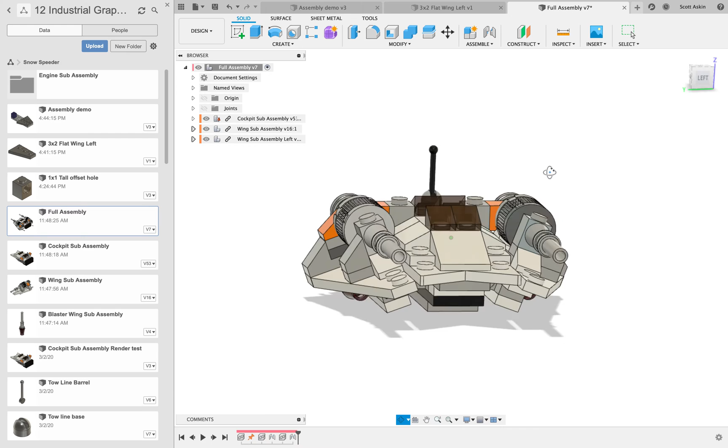The goal of this tutorial is to consider how you can mirror not just a single part but a whole sub-assembly. To explain that, I want you to just have a look at my snow speeder here, and you can see that the engine assembly on the right is identical to the engine assembly on the left.

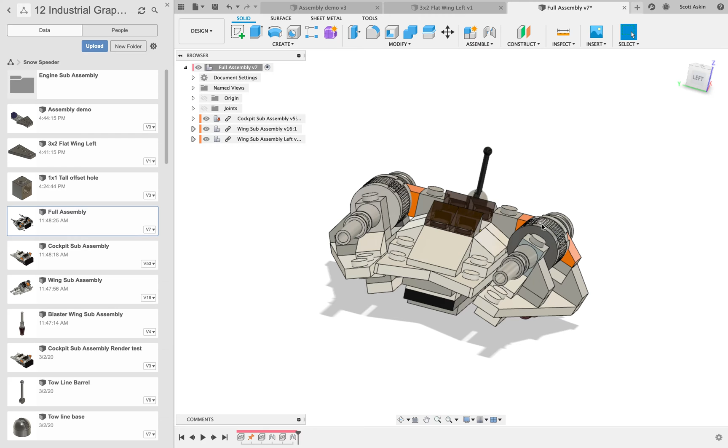So when I was building this, I made the decision that I would build the cockpit as one assembly, and then I'd make this whole engine and wing sub-assembly as another piece. Now, to save me countless hours of having to assemble this left engine and all the wing, I can actually grab the right engine and wing assembly and mirror it over to the left. I can create a left hand wing if you like.

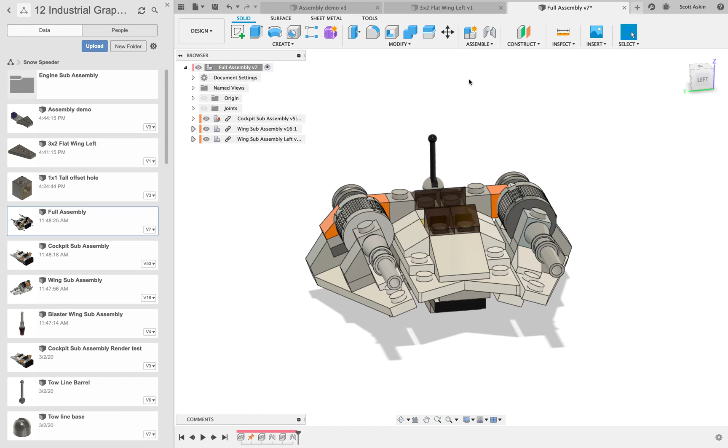So I'm not going to do it with this actual design because it takes too long to do, but what I want you to do is to go back and open up your assembly demonstration that you've been working on. So go back and open up this one here, which we did last lesson actually. We're going to do something similar where we're going to grab this entire assembly and show you how to mirror it to create a left hand side.

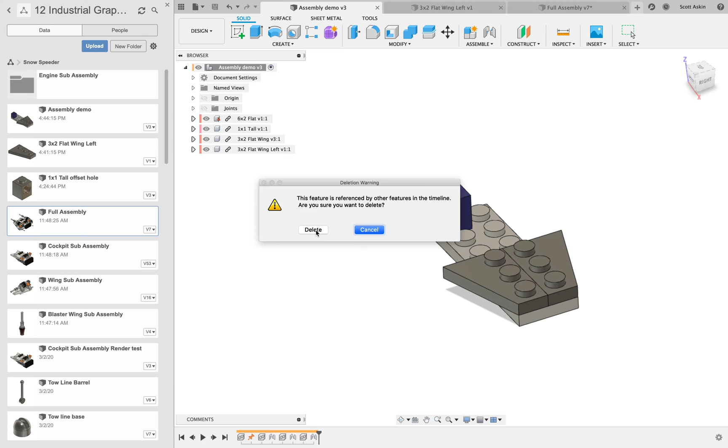So the first thing we'll do is we'll just remove the last wing that I put in there. So select it, right click and delete. That's okay, we can hit delete and then hit save. And then we'll select all these components, mirror them about a plane out here somewhere in space, and then create a left hand side of this.

So if I was going to name this as something now, I'd probably name this as assembly demo right. So this is the right hand side, and then I'll have assembly demo left over here for when I actually mirror to the left. So it's a little bit different from a straight body or single component mirror. There's a few more steps you've got to do.

Alright, so whenever you've put something into an assembly, you'll see the parts here then appear as what we call components. They're no longer bodies. If I expand that there, all these bodies are sitting inside of this component.

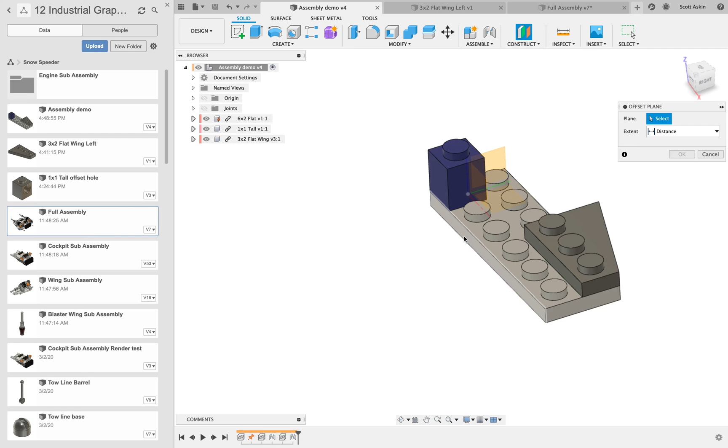So what we're going to do is still use the mirror command, but before I go there, I'm going to set myself a work plane out here somewhere in space that's going to be my mirror. So go to construct, offset plane, select a face here, and then just drag a plane out there in space somewhere. I really don't care how far away, let's just make it 20 millimeters for argument's sake. That's going to be the plane that I use to mirror all this about.

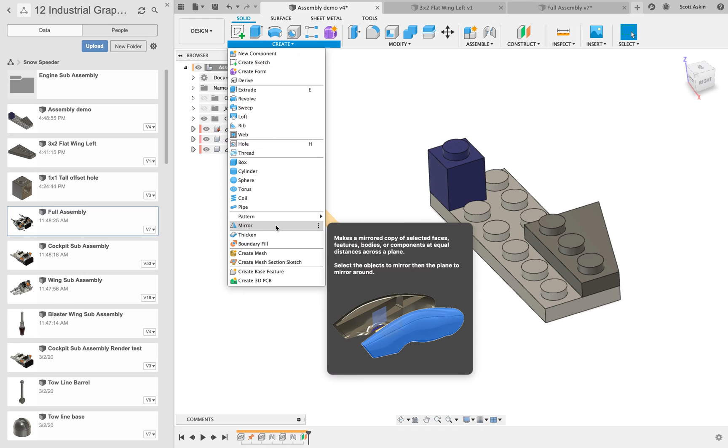Once you've done that, step 2, go to create, come down to the mirror icon, and at the moment it's looking for a bunch of bodies. Let's change that to components, and then we can put a box around all those components, and it stores those components. So you can see it's selected 3. I could have also selected them there as well.

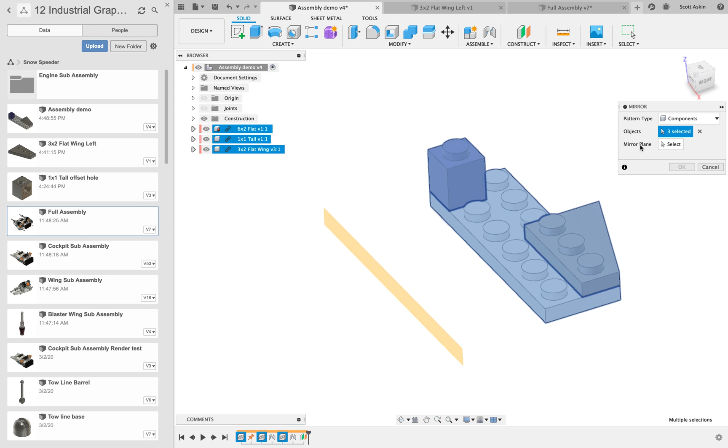Now it's asking for the mirror plane. It's pretty simple. You click on the box, click on this plane here that we just put in, and you can now see it's created a perfect mirror. We've got a right hand assembly and a left hand assembly. Click OK.

But now we've got to get rid of this original right hand because I want to use this left hand assembly by itself. So you'll notice that there's these little chain links on the first 3 components of the original assembly. If we want to remove these parts, first of all we've got to break the chain between this mirror and the original parts here.

So you select the parts that were there originally, just hold down shift and you can select more than one at a time, and then right click, and one of these icons here is called break link. So click on break link, and the computer then goes through a little series of breaking those links, which I think it's done. Yes, the links have disappeared.

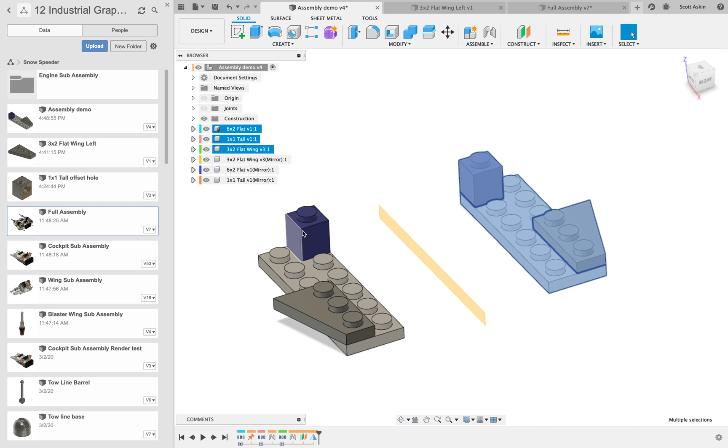And then we get rid of these 3 pieces by clicking the top one again, hold down shift, make sure you get the right ones, don't get the left ones, and then right click. Don't delete them. If you delete them, you'll lose all the mirror. You just want to remove them from this assembly. Click on remove. They've now been removed from this assembly.

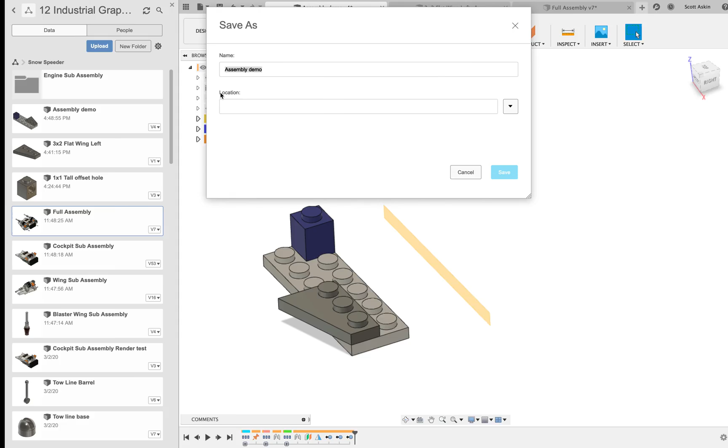Then you would save this as the left-hand assembly. So I'm going to go File, Save As, Assembly Demo Left. The first one I should have called Assembly Demo Right. Then click on Save. Go back there again. There you go, Assembly Demo Left. And of course if I went back over to my other demo, I should still be able to see the right one. There it is there.

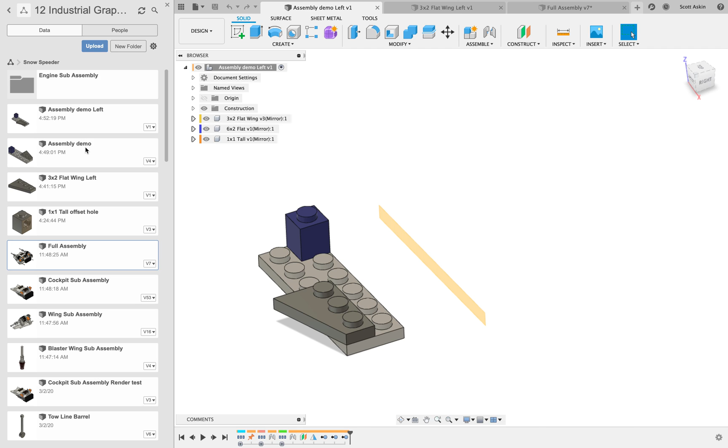So if I just double click on Assembly Demo. Any second now. There it is there. There's the original one, Assembly Demo. I'd probably call that right. And then we've got the one for the left. You can now use that and assemble it with other assemblies to create whatever your final part might be.

So just to recap, that's how to mirror an assembly to make a left and a right pair of something.